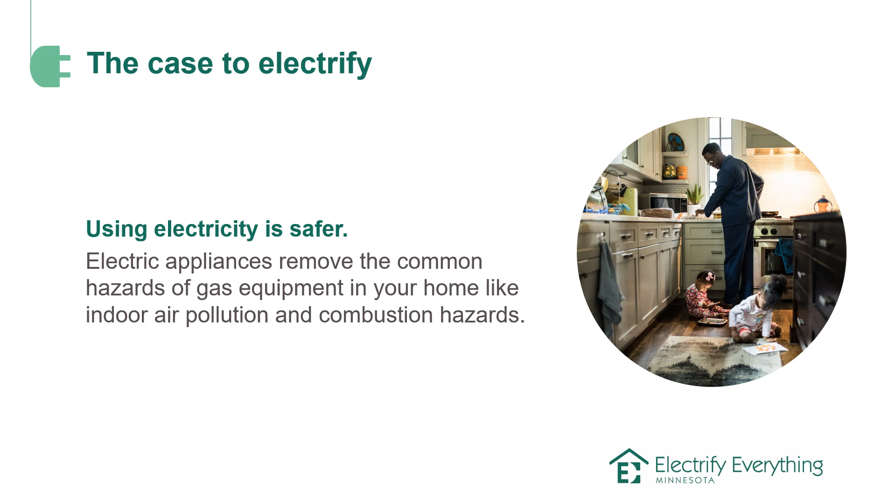Electricity rates are also more stable than natural gas rates. Electricity rates historically grow at an incremental pace because they are regulated here in Minnesota by the Public Utilities Commission, so the changes are more incremental, while fossil fuel prices are more volatile because they're purchased on the open market. A big example of this was the big storm in Texas a few winters ago, when natural gas prices spiked across the country.

Electrifying our homes also makes a difference for the health of people and the planet. We can all take part in climate action by transitioning our home equipment to electricity from gas. This is a really tangible step for your family to fight climate change through the improvements to your home.

So electrification is really exciting in principle, but the challenge is that it can be very confusing. What exactly goes into electrifying a home? There are many questions that homeowners encounter when considering how to electrify their home.

How do I decide which projects to pursue? What are the equipment options and how do they compare to each other? What resources and incentives are available to help with the cost? And who do I talk to for guidance and bids? What can I do DIY or myself? These are all really common questions and more that you'll encounter along your electrification journey, and we'll dive into the answers in this presentation.

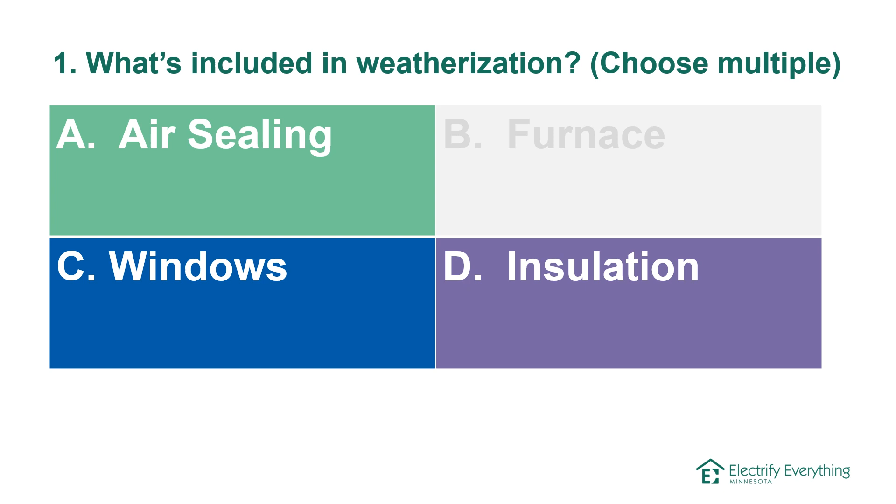Weatherization involves improving the parts of the home that keep heated or cooled air from escaping - that's insulation, air sealing, and windows. Weatherization makes electrification easier and more effective. Insulation keeps the heat you put in your home inside in the winter. Air sealing prevents that heat from escaping through cracks and leaks in your home. And windows, if they are old or leaky, can be sealed up or replaced to prevent heat and air loss.

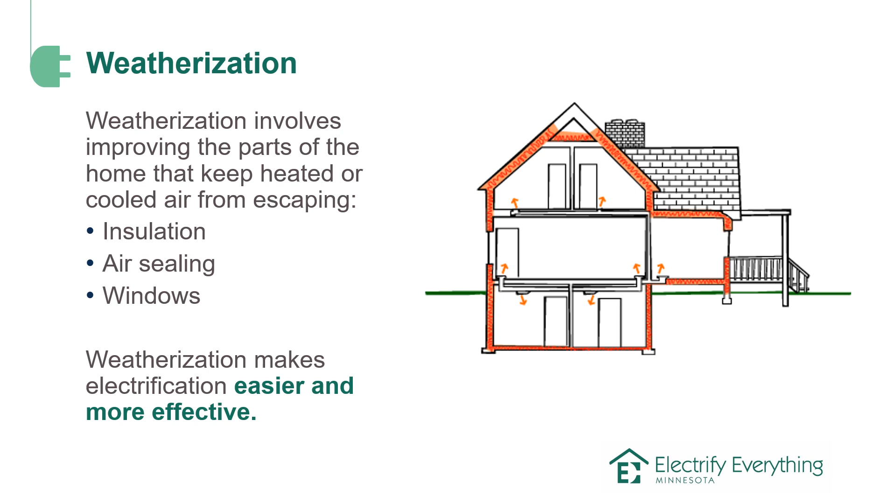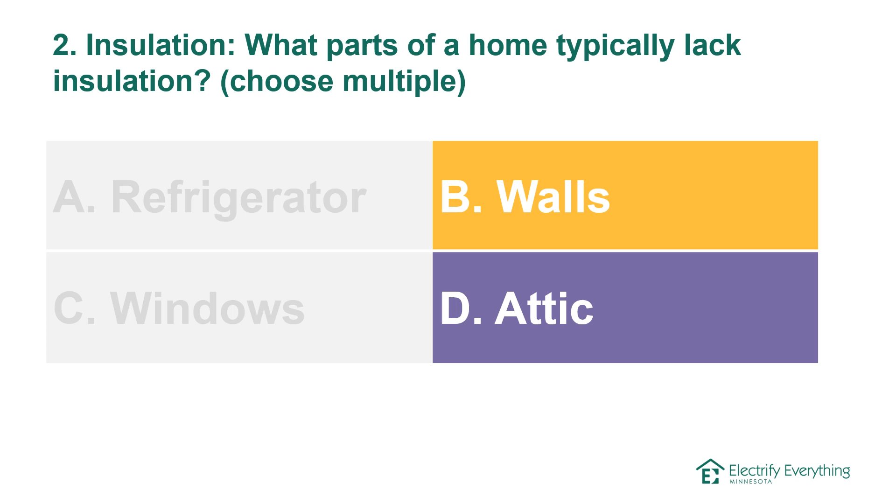So, insulation - what parts of a home typically lack insulation? The refrigerator, the walls, the windows, or the attic? The answer is the walls and attic are the most common places where insulation is lacking. The reason for this is that most homes built before 1980 often lack wall and attic insulation.

Insulation and air sealing saves 18% in heating and cooling costs in the average Minnesota home. That's a huge reduction in your energy bill every month. It's also cost effective - it'll pay for itself over time as you reap the benefits on your lower energy bills after doing insulation and air sealing work. It also improves comfort - those drafty rooms will be more airtight and well insulated. It's like putting a big blanket and windbreaker on your home to keep all the heat in, or the cool in the summertime.

Insulation and air sealing prevent ice dams. Ice dams are those big icicles we see hanging off our roofs in the wintertime. Those are caused by heated air escaping from the home, heating up the roof deck, melting the snow, and then causing freezing at the eaves, and then causing that buildup.

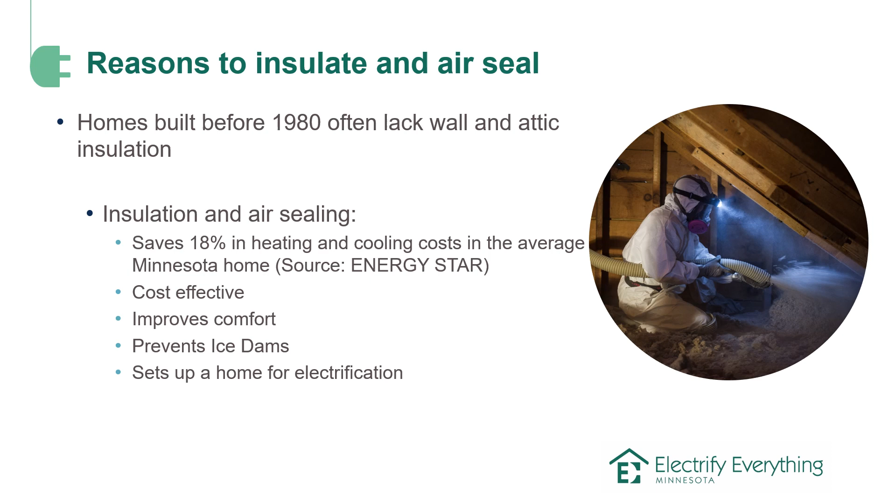The big piece is that weatherization, or insulation and air sealing, sets up a home for electrification. When we can keep the cooled and heated air that we put into our homes inside our homes, the other equipment, like a heating system, needs to work less hard.

Air sealing is a really important piece of insulation work that is often overlooked. Air sealing prevents conditioned air from escaping and outdoor air from entering. Common air leaks include attic hatches, lighting that penetrates through the ceiling into the attic, vents and chimneys like your plumbing stack, bath fan vents, chimney stacks.

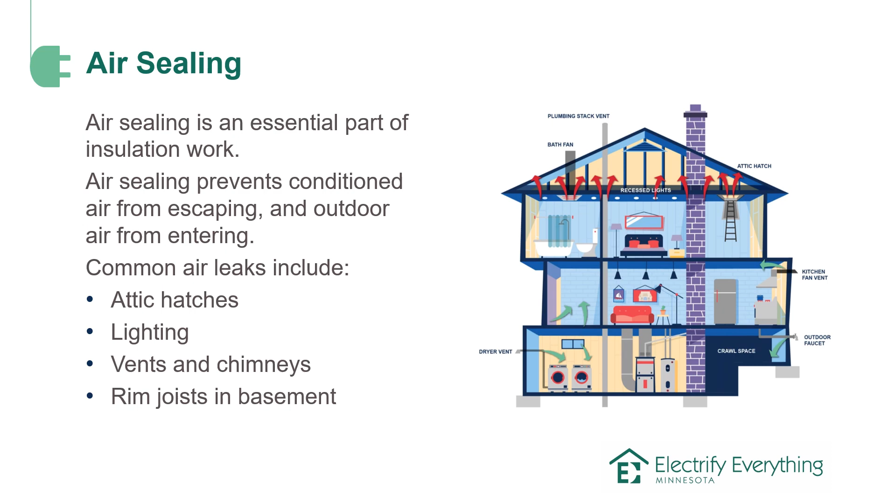And then rim joists in the basement, kind of where the wall of the basement meets the ceiling of the basement, is a really common place for cold air to enter the home. So you can put a bunch of cellulose or fiberglass insulation in your attic and your walls, but those are not actually air barriers. They're keeping the heat from transferring into the attic, but heated air can still escape through air leaks. So sealing up all those air leaks with caulking, spray foam, and other methods is really important.

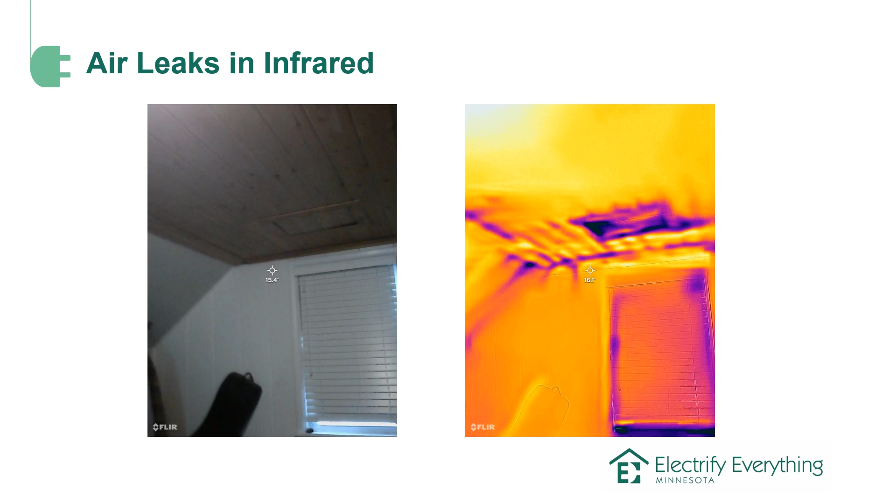Here is an infrared image of an attic. You can see on the left here, we've got a wall, a window, and then the ceiling. And on the right, all the purple spots are where cold air, or air leaks, are happening. We can see where the wall meets the ceiling, there's a lot of air leakage happening. The attic hatch is super leaky, and we also see some air leakage around the wall. So you can imagine in a whole house, there's a ton of little air leaks if they haven't been treated, and these can really add up to quite a bit of air escaping from your home.

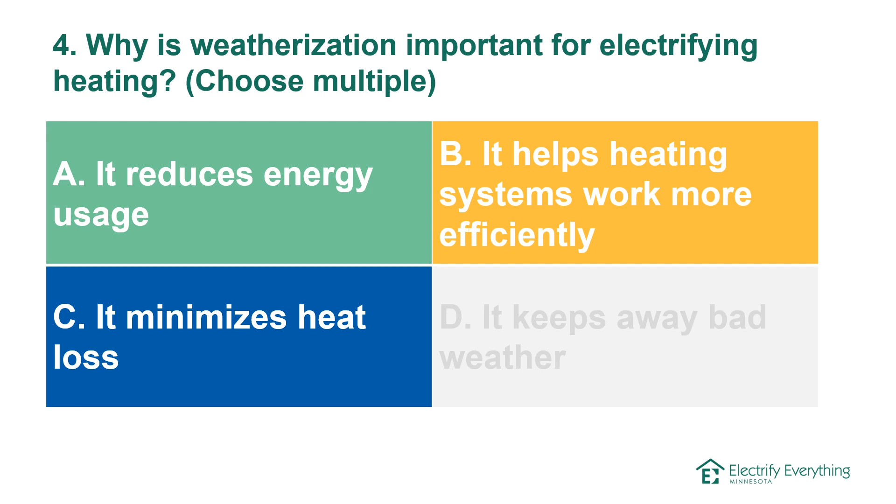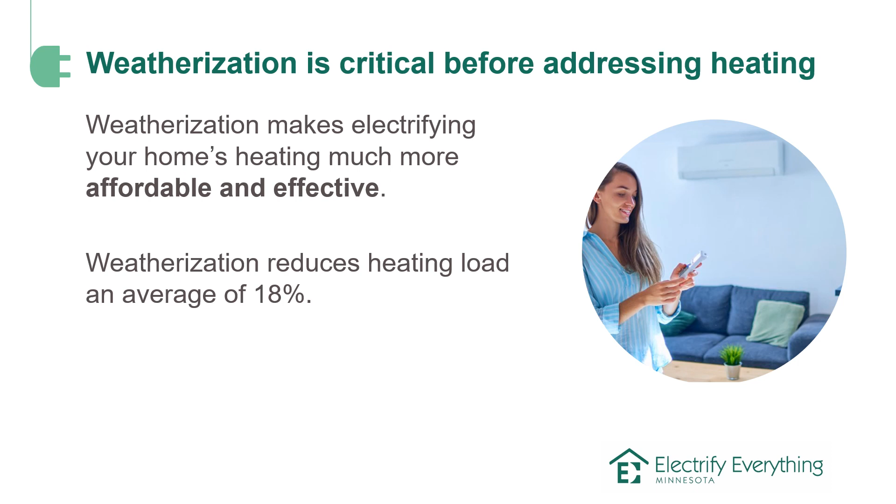So weatherization is critical before addressing heating. Weatherization makes electrifying your home's heating much more affordable and effective. We'll dive into this in a little bit, but weatherization reduces heating load on average by 18%. That's 18% less energy and heat you need to put in your home because it's not escaping once you've done insulation and air sealing.

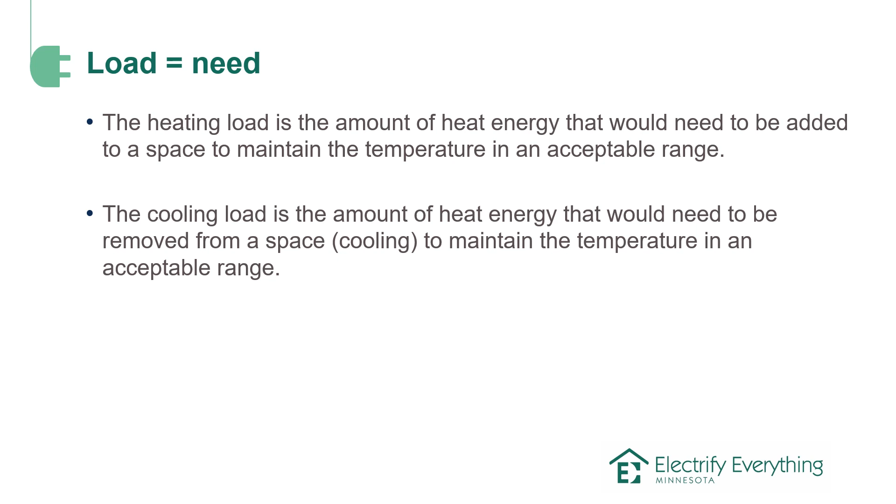A quick technical term: load, or heating load, is the same as heating need. The heating load is the amount of heat energy that would need to be added to a space to maintain the temperature in an acceptable range. The cooling load is the amount of heat energy that would need to be removed from a space, cooling, to maintain the temperature in an acceptable range. So when we say load, that's how much heating or cooling is required by your home to keep it comfortable.

Now we'll move from weatherization to heating.

Weatherization and heating equipment both address the main use of energy in Minnesota homes, which is heating. It's hard to understate how important this is here in our very cold climate in Minnesota, because 70% of the energy we use in our homes goes to heating for the year average. This is way higher than the national average, where 40% of all of a home's energy use goes towards heating. So when we are looking at ways to reduce energy use and electrify our energy use, switch from fossil fuels to electric, heating is the highest impact option.

So weatherization helps reduce the heating load required, so it makes that 70% go down, and then heating equipment, electric heating equipment, can help electrify that heating load.

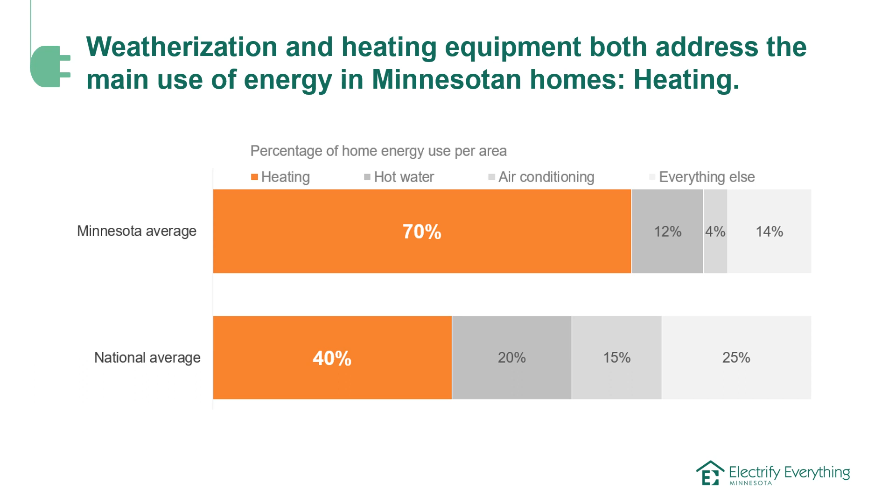So weatherizing before adding electric heating makes the switch easier and more affordable.

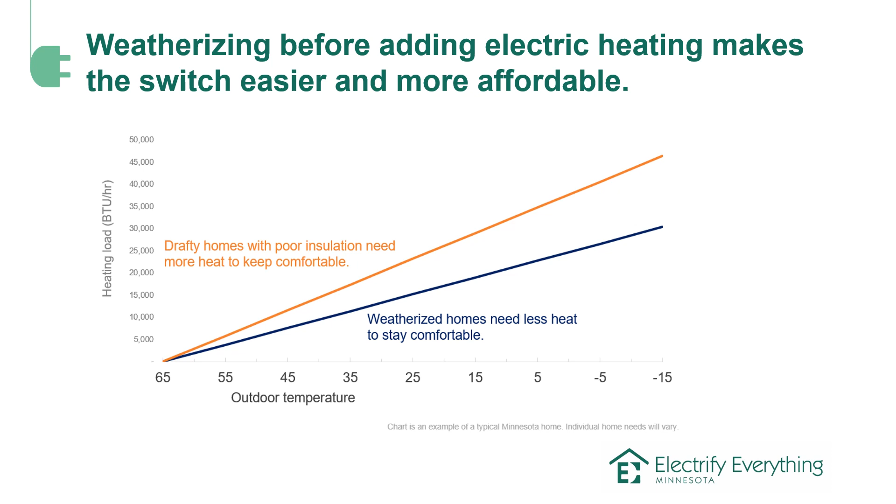This graph shows two homes. The orange one is a drafty home with poor insulation that needs more heat to keep comfortable, and the blue home is a weatherized home that needs less heat to stay comfortable. On the left axis is the heating load required, and on the bottom is the outdoor temperature. At 5 degrees, for example, the unweatherized orange house requires a lot more heating load capacity

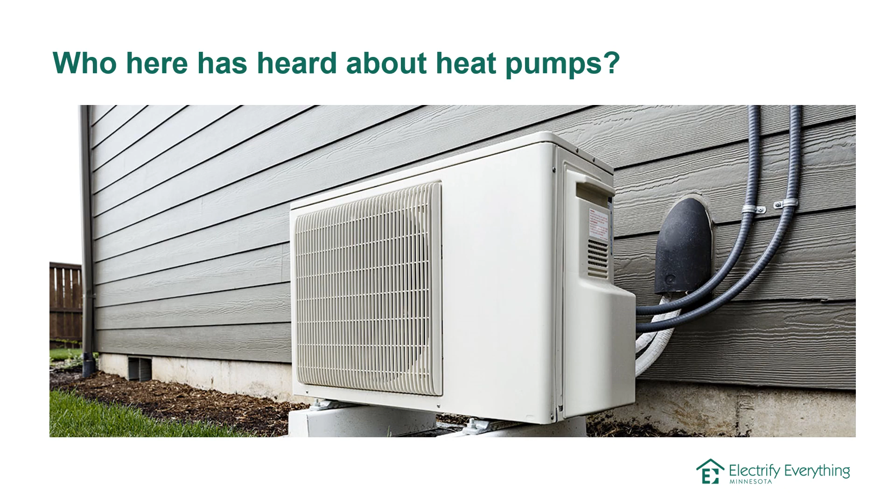than the weatherized one to stay comfortable. So this is where heat pumps come in. Heat pumps are a great option for efficiently electrifying your heating load. Now we're going to dive into these.

True or false: a heat pump can heat and cool your home. The answer is true. Heat pumps both heat and cool a home.

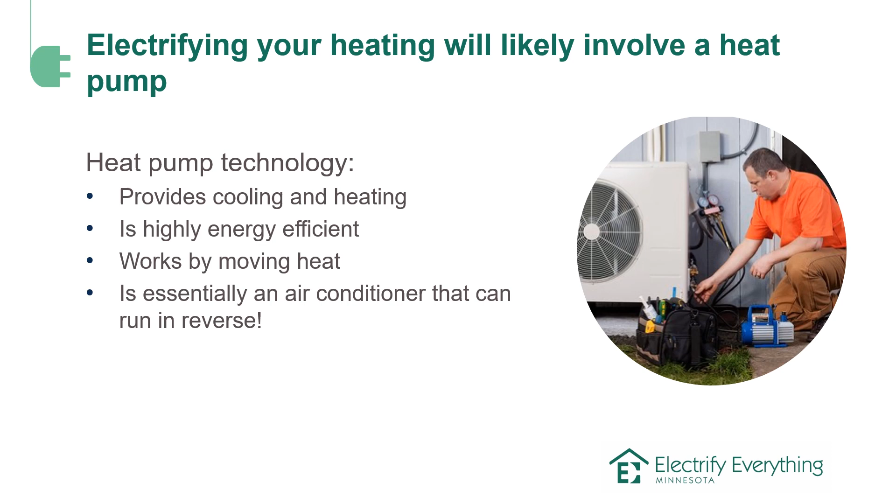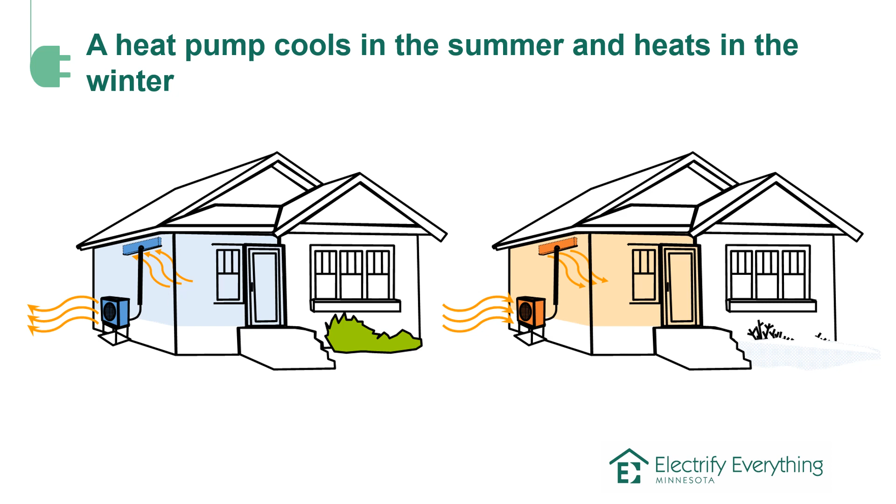In the summertime, heat pumps work the same way that air conditioners do by moving heat from inside your home to outside your home. They're basically extracting heat inside and moving it outside to keep it cooler inside your home. This is the same way your air conditioner works, and also the same technology your refrigerator uses.

In the wintertime, to heat, the heat pump moves heat from the outside to the inside. So it extracts heat from the air outside, even in very low temperatures, and moves it to the inside. By transferring heat instead of creating it, like by burning gas or heating up metal like electric resistance heaters, it's way more efficient even at cold temperatures outside.

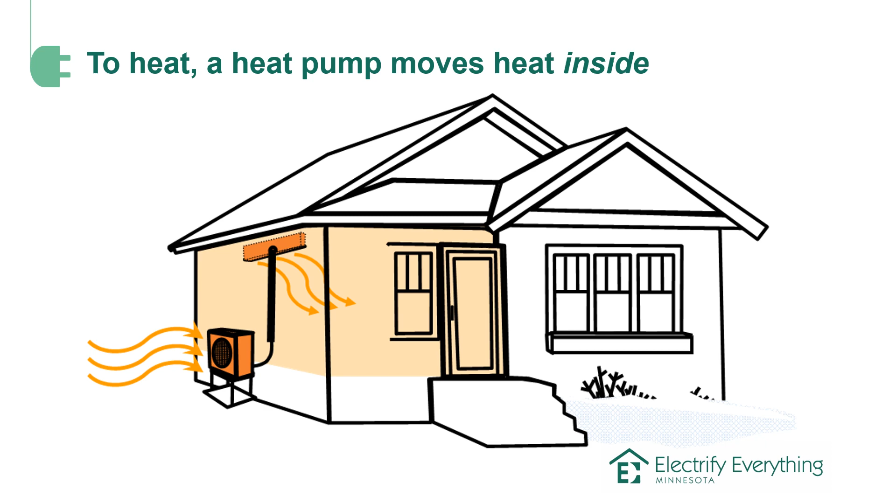The answer is C, 3 times more efficient. Electric resistance technically converts 100% of the electricity used into heat by putting all of that electrical energy into the metal elements that then heat the room. However, air source heat pumps, because they are moving heat from the outside to the inside, can technically be up to 400% efficient. So the electrical energy they require can create 4 times that amount of heat by transferring it into the house. Pretty cool.

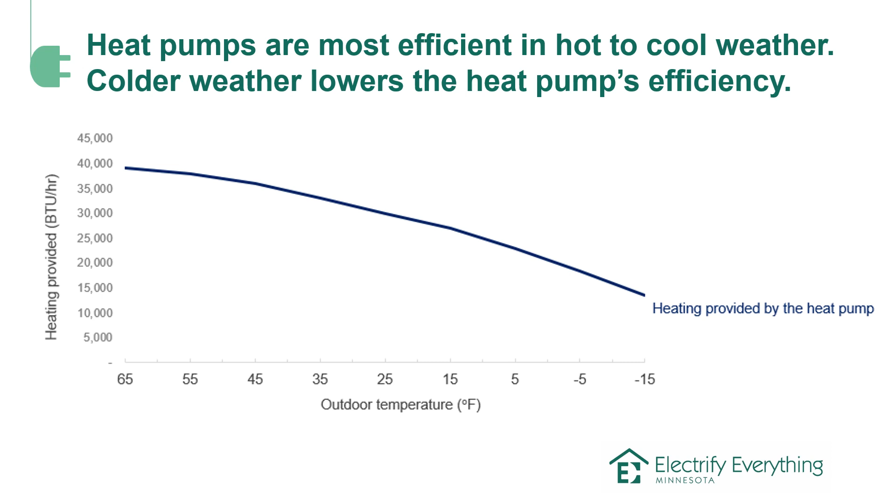Another reason why weatherization is so important is that you can use a heat pump for more of the winter with proper home weatherization. An unweatherized home that's poorly insulated and drafty can heat with a heat pump down to roughly 20 degrees Fahrenheit, and when the outside temperature is below that, the backup heating system - whether that's a furnace, boiler, or electric resistance - would kick in. That same home, if fully weatherized, that same heat pump could provide all the heating that home needs down to 5 degrees Fahrenheit or even below, before the backup system needs to kick in. So by weatherizing, we greatly expand the capacity of the heat pump to provide most of the heating that home requires.

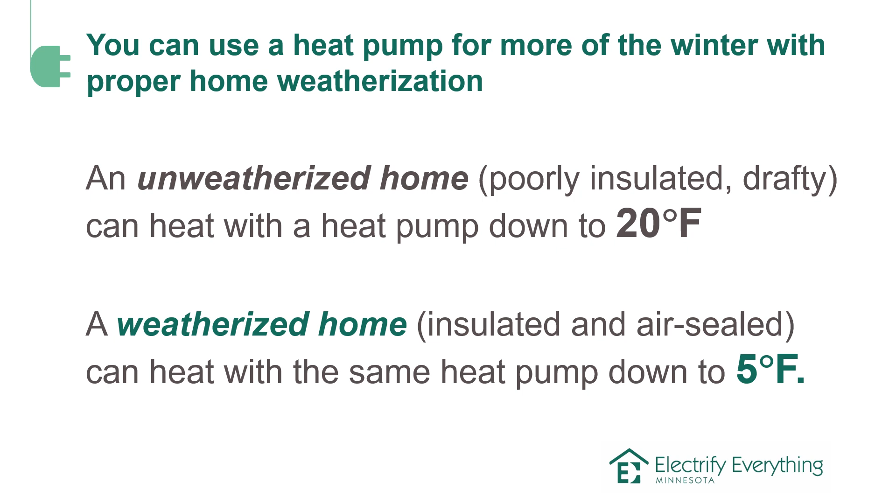However, if that same home is weatherized, the heat pump can cover 95% of the heating hours of the winter when it's running down to 5 degrees Fahrenheit outside temperature. So yeah, those really cold days where it gets below zero and well below zero are good days for a backup system to kick in, but they make up really just 5% of the winter, and the rest of the time the heat pump could be providing all of your heating with carbon-free electricity.

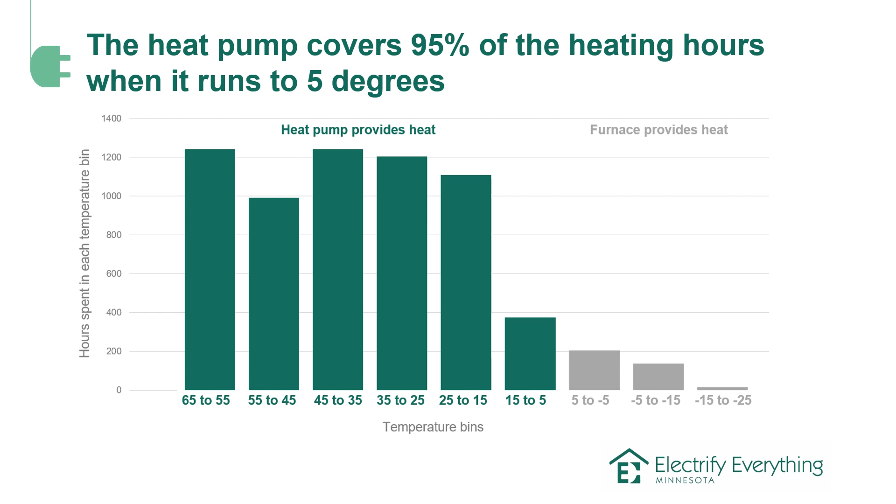So now that we've talked about how weatherization and air source heat pumps go hand in hand, we can talk about different heat pump setups. Heat pumps can either partially or fully electrify your heating needs, and your choice of secondary heating source determines whether it is a partially or fully electric system. Partial or dual fuel is a system where your heating switches between the heat pump and the furnace or boiler depending on the outdoor air temperature. A fully electric system would mean your heating is provided by your heat pump alone, with a booster electric resistance heating for those really, really cold days that get well below zero.

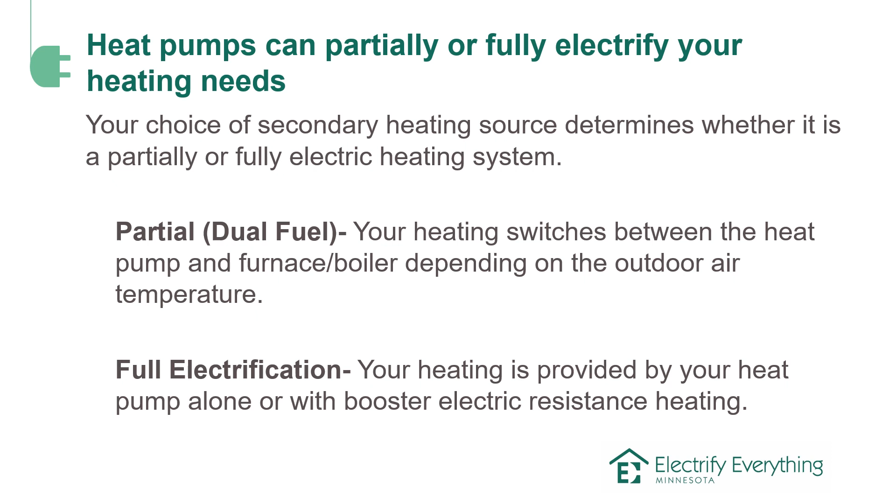So dual fuel would look like this. In the summertime, the heat pump provides cooling. In the fall, the heat pump provides heating. In the winter, when it gets below 20 degrees, you could set it so that the furnace heats your home. And then in the spring, again, the heat pump will kick in when it's more mild.

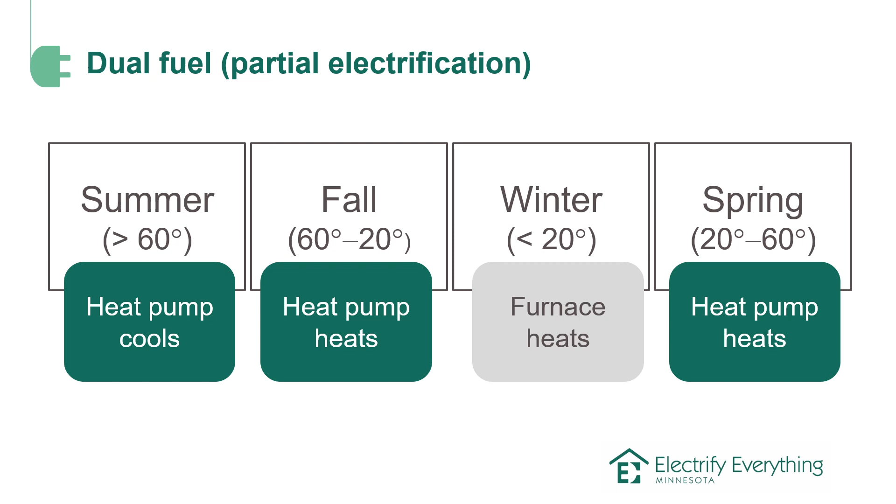So what are the benefits of a dual fuel heating system? A, fuel flexibility to keep bills low. B, cooks your food. C, efficient heating and cooling. And D, zero emissions potential.

The answer is A, fuel flexibility, and C, efficient heating. That fuel flexibility to keep bills low is a big one. With a dual fuel system, you can choose the point at which your heat pump switches over to the backup system. You can optimize that for costs, so you could switch over when natural gas is cheaper to use for heating than electricity based on your heat pump's efficiency, or you can do it based on your heat pump's capacity, where you switch over when the heat pump can no longer provide the full heating that your home requires because of the low outdoor temperature. So it provides a lot of flexibility and control, and it's also a really highly efficient way to heat and cool your home compared to the other options.

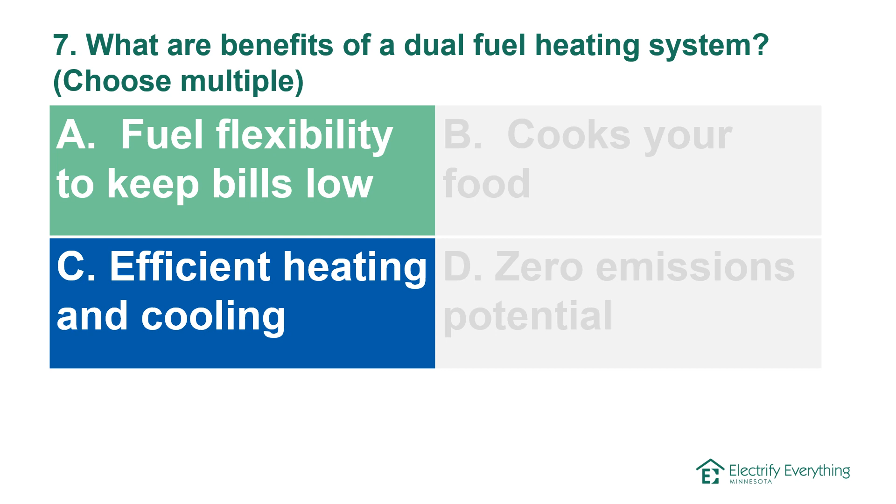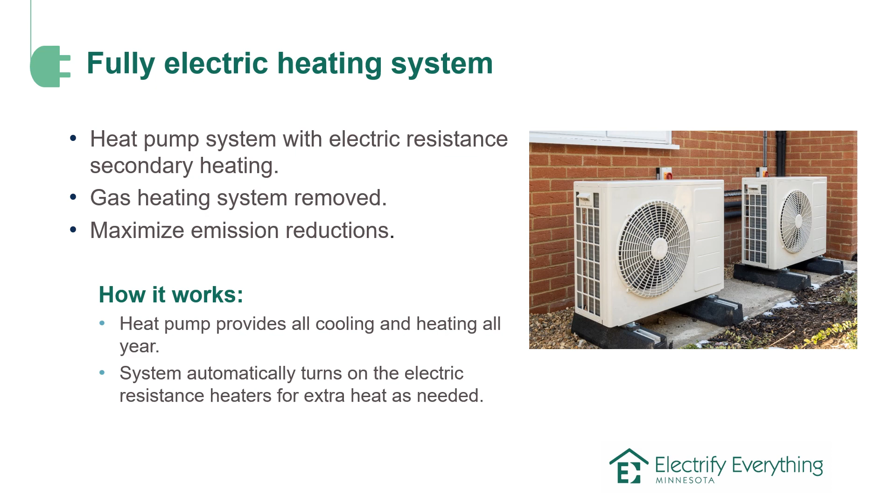So a fully electric heating system would include a heat pump system with electric resistance secondary heating. Gas heating is completely removed in this scenario, and it maximizes emissions reductions. The way it works is that the heat pump would provide all the cooling and heating all year, and then the system would automatically turn on the electric resistance heaters for extra heat as needed on those sub-zero days when the heat pump needs a little help to meet your home's heating needs.

So what are the benefits of a fully electric heat pump system? A, it doubles as a security system. B, efficient heating and cooling. C, lowest winter heating bills. Or D, zero carbon potential.

The answers are B, efficient heating and cooling, and D, zero carbon potential. And we'll explain why on the next slide.

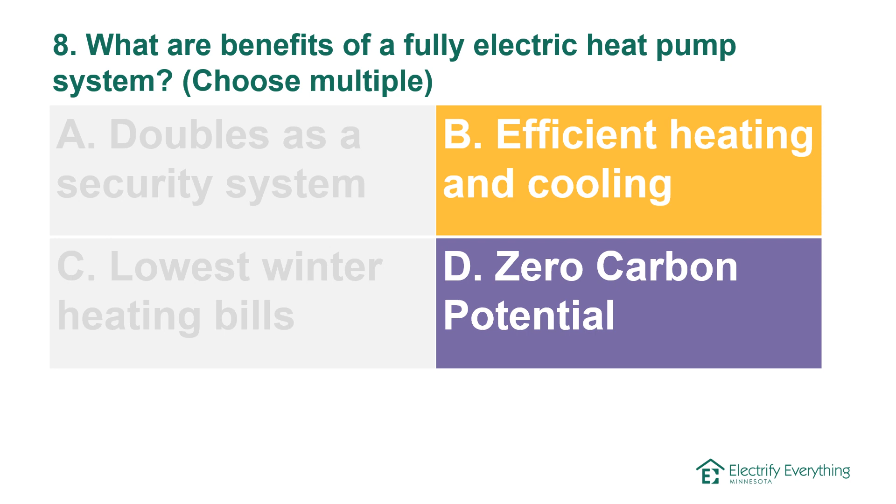What are the pros and cons of a fully electric heating system? The pros are zero carbon emissions potential. This is one of the answers in our previous trivia question. By having a fully electric heating system, a renewable energy subscription or solar panels on your roof can make your heating system zero carbon now, immediately, before the grid reaches carbon neutral in 2040 here in Minnesota. So this is a really big impact for climate. That said, the electric grid in Minnesota is clean enough, has enough green energy on it, that using an electric system has fewer emissions than a gas system, even without extra renewable energy subscriptions.

Another pro is that a fully electric heat pump system is very efficient for heating and cooling. A con is that secondary resistance heat is expensive, more expensive than a natural gas backup. So bills may be higher than a fossil fuel system on the coldest days here in Minnesota. Those days are relatively few each winter, but the fully electric system does lack the option to optimize whether you use electric or natural gas based on cost efficiency. So that's the one con here.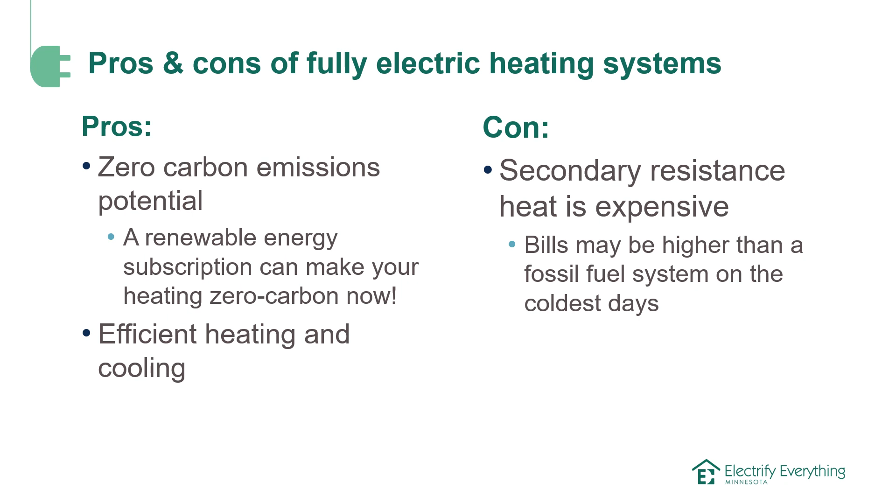And with that wraps up our heating section. The next area of electrification we're going to talk about is our appliances. So the biggest opportunities to electrify your appliances are with water heaters, using a heat pump hybrid water heater; cooking ranges, that's stovetop and oven, upgrading to an induction range or a traditional electric range; and clothes dryers, either a heat pump ventless clothes dryer or a traditional electric clothes dryer.

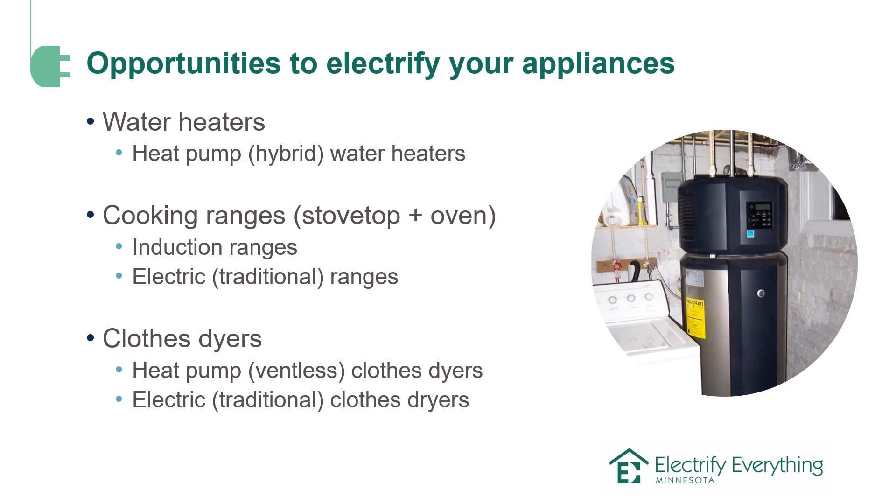So we'll start with water heating. Of our appliances, besides the heating system, water heaters typically use the most energy, and hybrid heat pump water heaters are very energy efficient. So it's an energy efficient way to electrify your domestic hot water. They're safer than gas because they don't have any combustion systems in them, so they can't leak dangerous gases into your home. And they are more efficient than electric resistance, making them cheaper to operate.

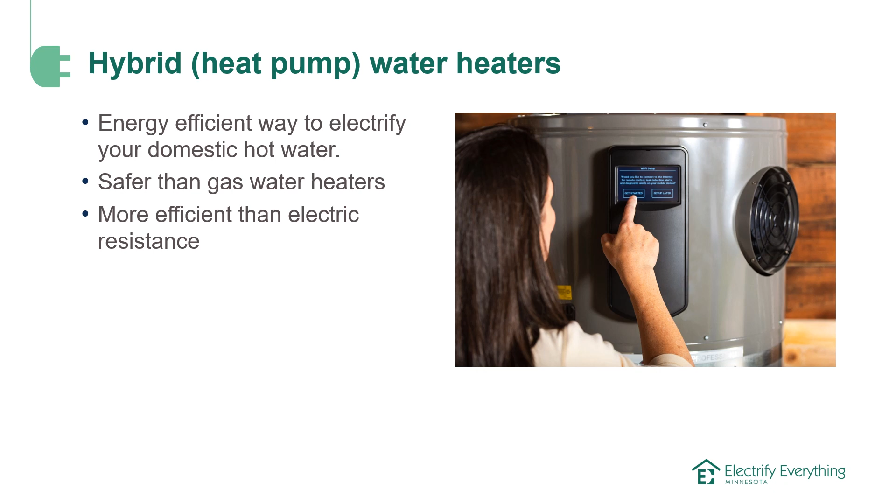We'll start with water heaters. So hybrid heat pump water heaters use the same technology as an air source heat pump or refrigerator. They move heat from the surrounding air into the water through coils to heat the water. They also have electric resistance elements that just use electricity to heat up metal to help add additional heating capacity when necessary to reach temp. When the heat pump pulls in air from the surrounding area, it'll blow out cooler air because it has transferred the heat into the water. And the combination of heat pump and electric resistance enables heat pump water heaters to provide hot water as frequent and fast as other water heaters, which is great.

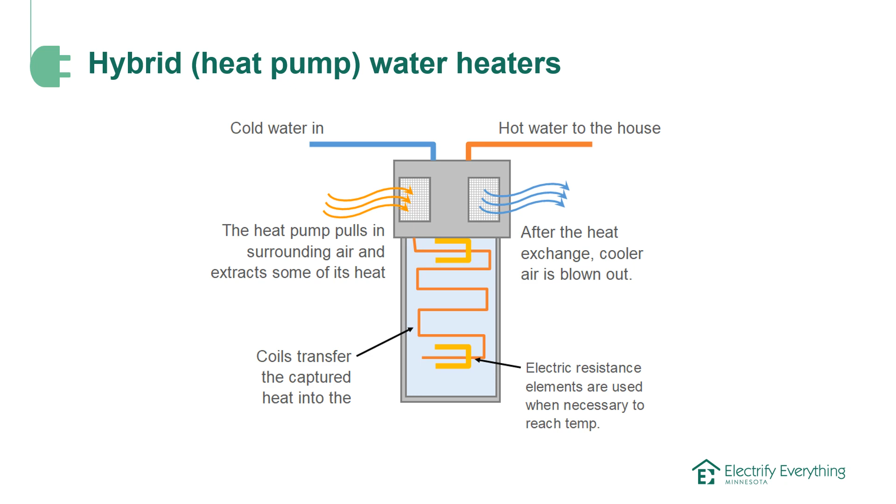So to compare hybrid heat pump water heaters to traditional electric resistance water heaters: the first difference is that hybrid heat pump water heaters have the heat pump and the heating element, while electric resistance has the heating element only. Heat pump water heaters are much more energy efficient than electric resistance, which makes them have a much lower operating cost. Some additional differences are that heat pump water heaters will dehumidify the air a little bit because of the condensers they use, and they exhaust some cool air into the basement or the area where the water heater is, and they make some noise when running - there's a fan running, pretty similar to a power vented gas water heater if you have one of those in your home. Electric resistance water heaters do not have any of those features and make pretty much no noise when operating.

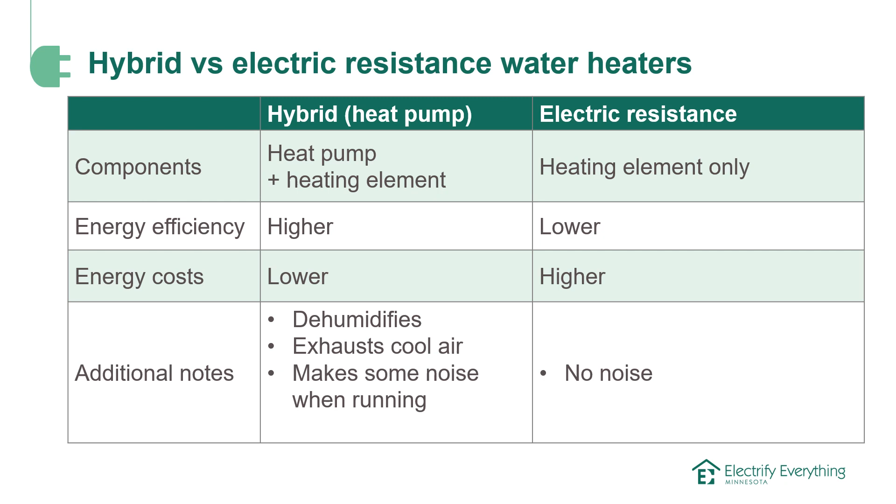So, a heat pump water heater uses how much less energy than an electric resistance water heater? 10%, 33%, 50%, or 66%? The answer is 66%. So they use a lot less energy and cost a lot less to operate than traditional electric water heaters.

As a comparison for savings, switching from a standard electric water heater to a hybrid heat pump water heater will save about $300 to $500 annually on electricity costs, which will make the payback for upgrading pretty fast. A switch from a standard gas water heater to a hybrid water heater will have savings anywhere from breaking even to $175 annual savings. So this is a big win for the climate and can also lead to dollar savings on your bills each year.

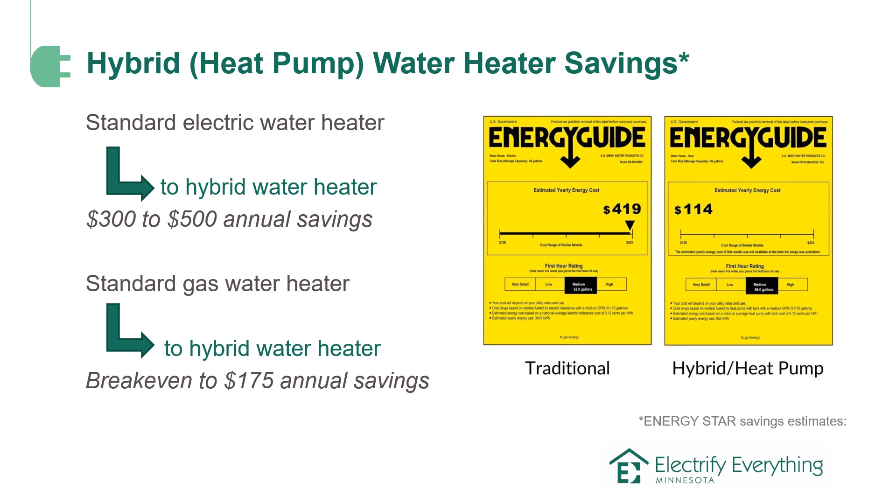These guides on the right here just show two example water heaters. A traditional electric might cost $419 a year to operate, while a heat pump water heater would cost just $114 a year. So a pretty big difference.

Now we'll look at induction ranges. So induction ranges transfer energy directly to the cooking pan through a magnetic field. Instead of heating up a metal element like traditional electric or lighting gas on fire like a gas range, they use electromagnetic waves to heat up the pan itself rather than the surface. Water boils in less than half the time on an induction range, so they have really great control and speed of cooking. And the cooktop surface is safer - it doesn't get as hot, and cleaning is super easy with these stoves.

So thinking about induction ranges, how fast can an induction range boil a quart of water? 2 minutes, 4 minutes, 8 minutes, or 12 minutes? The answer is 2 minutes. Gas and traditional electric ranges typically take 7 to 12 minutes to boil water, so way, way faster on an induction range.

That said, for cooking, a traditional electric range is also a really great option for electrification. They create heat by running a current through a heating element. They're widely available and very affordable, so they can be great for a quick replacement option. They're a little less energy efficient than induction ranges, and slower to warm up and cool down, and harder to clean. But as far as total energy use of your home compared to an induction range, you'd save a little bit, but not a lot. These can be an easier entry-level option for folks looking to electrify their cooking.

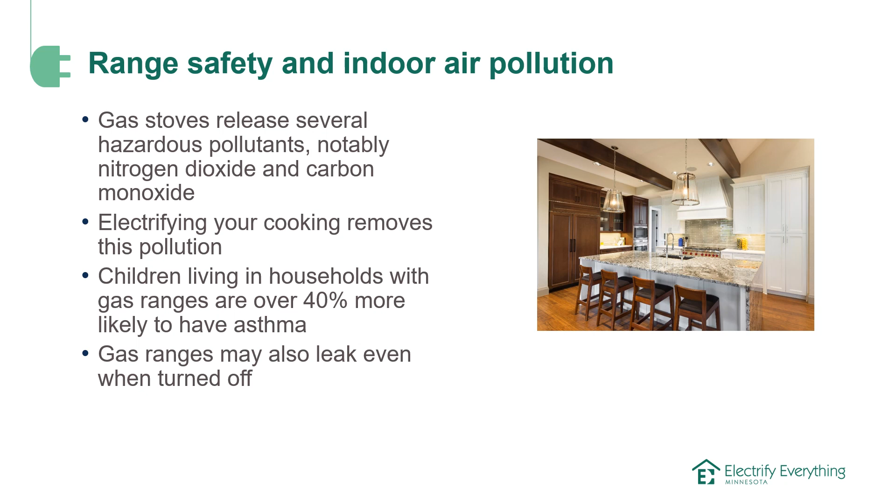A big reason to switch from fossil gas cooking to electric cooking is safety and indoor air pollution reduction. Gas stoves release several hazardous pollutants into the living space, such as nitrogen dioxide and carbon monoxide. Electrifying your cooking removes these pollutants from your home completely. A study by the International Journal of Epidemiology found that children living in households with gas ranges are over 40% more likely to have asthma. Gas ranges also may leak dangerous pollutants into the home even when they're turned off. So they just can be a big health risk that can be avoided through electrifying your cooking.

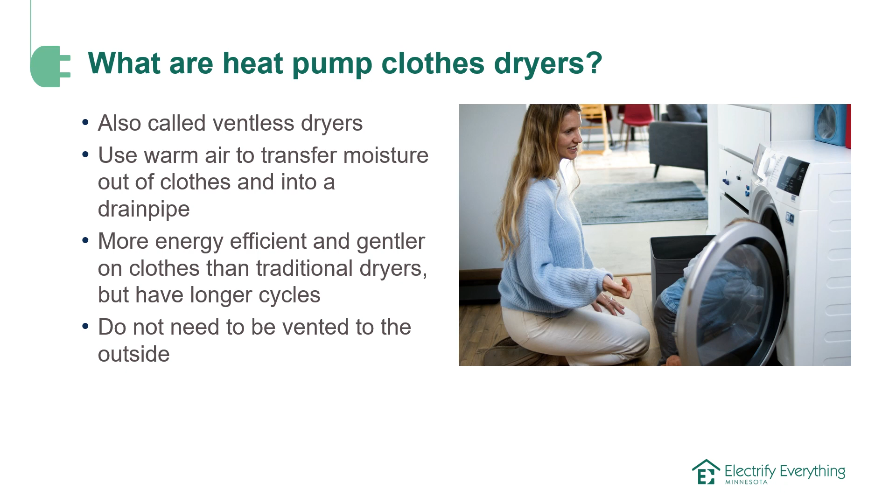All right, now let's talk about dryers. So what are heat pump clothes dryers? They're also called ventless dryers, and they use warm air to transfer moisture out of the clothes into a drain pipe. They're more energy efficient and gentler on clothes than traditional dryers, but they do have longer drying cycles than traditional dryers. They do not need to be vented to the outside, which is a really big advantage, so they can be placed anywhere in the living space where a plug is accessible.

So a heat pump dryer uses how much less energy than an electric resistance dryer? A, 10%, B, 20%, C, 50%, or D, 200%. The answer is 50% less energy.

While they use more electricity than heat pump dryers, electric resistance dryers are a great electrification option if you have a gas dryer already. Electric resistance dryers use heat from electric coils rather than combusting gas to dry the clothes. They're widely available, affordable, and they dry clothes very quickly. Compared to heat pump dryers, they use about twice as much energy, and they also need to be vented to the outside. So those are the two trade-offs, but they're again a really great option for electrifying at an entry-level point.

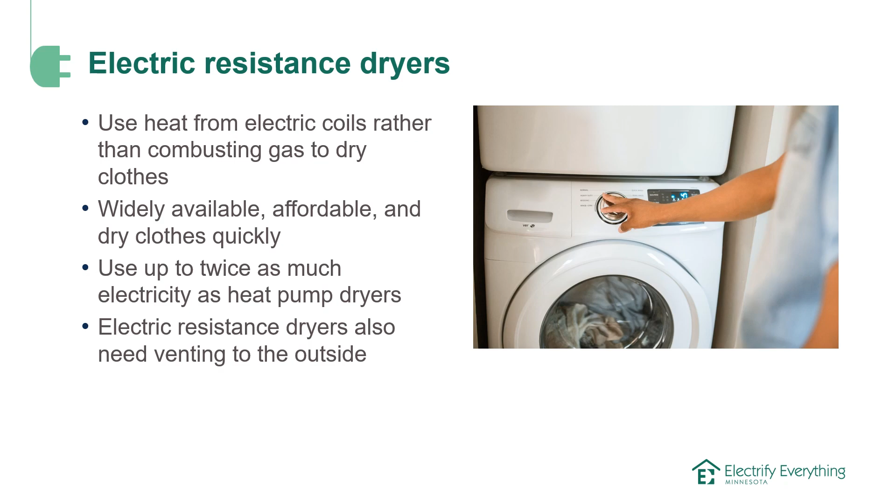And that wraps up our appliance section. So now we'll talk about your home and how to get your home ready for electrification.

Some homes will need pre-work before electrifying. Common upgrades needed by older homes include an upgraded electric service panel and modern wiring. Believe it or not, homes built in the 1900s were not necessarily built ready for heat pumps and heat pump dryers and all this. So it's possible that you may need to upgrade your electric panel to have more capacity to install these new electric appliances. And some homes with old wiring, such as knob and tube wiring, may need to upgrade for safety and to be able to install these new technologies.

These projects will make it possible to add electric equipment later. A common upgrade is from a 100 amp to a 200 amp service panel, and consulting an electrician regarding the needs for your home is the best place to start. Our energy advisors can also give you a hand here, and we'll talk about them in a second.

Beyond pre-electrification work, a really great place to start is a visit with the Home Energy Squad. The Home Energy Squad is a low-cost utility program, and they will come to your home, conduct an energy audit where they will look at your heating system, so you'll find out what systems you have, what equipment your home has, and how old it is. They will assess the weatherization, so the insulation, air sealing, and windows, to determine if your home could benefit from more weatherization. And then they will connect you with recommended contractors and incentives afterwards. So this is a really great place to start if you aren't sure exactly where your home is and if you want help prioritizing which electrification projects to start with.